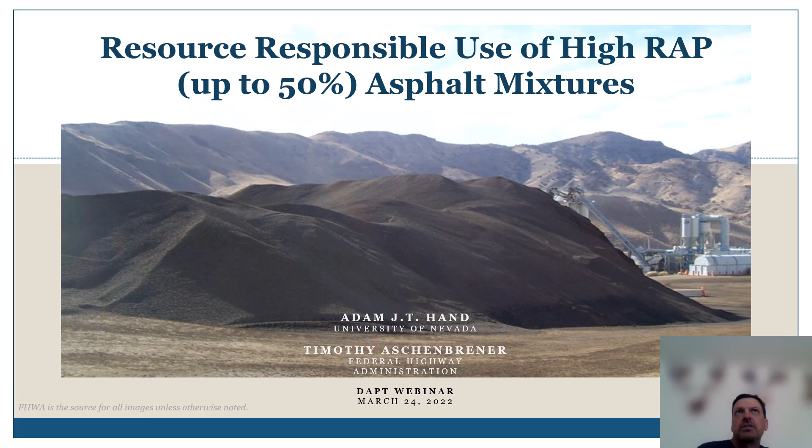Hi, I'm Adam Hand at the University of Nevada, and I'm going to talk about resource responsible use of high RAP up to 50% asphalt mixtures. This was developed with myself and Tim Aschenbrenner of FHWA, and it was developed under a cooperative agreement with the Federal Highway Administration. It's all about implementation. UNR is the prime contractor, and ARA and Paragon Technical Services are our partners on the project.

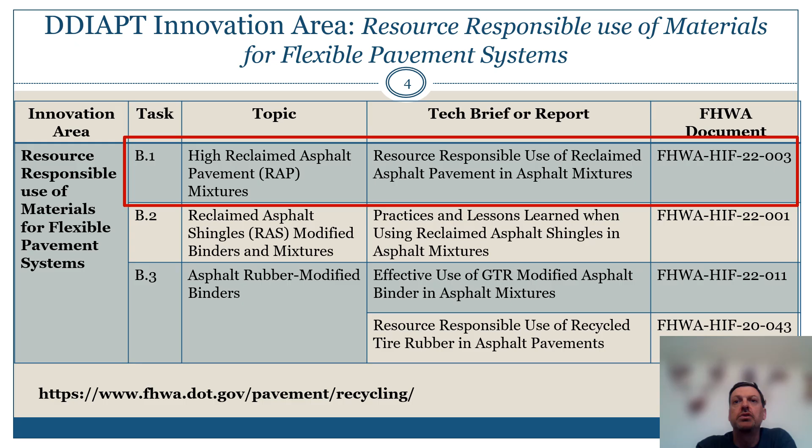This work that we're presenting today is one of about 15 different tasks we have ongoing. This task is associated with the topic of high reclaimed asphalt pavement mixtures, and the reason I wanted to stop on this slide was to highlight the title of the tech brief associated with this webinar presentation. At the URL on the bottom of the screen, you can find the tech brief, and the document is FHWA HIF 22-003.

Our target audience today, and with all of these implementation focused webinars we're doing in this series, is really state DOTs, asphalt contractors and producers, as well as the engineering community that works both for the DOTs and contractors, and of course academics.

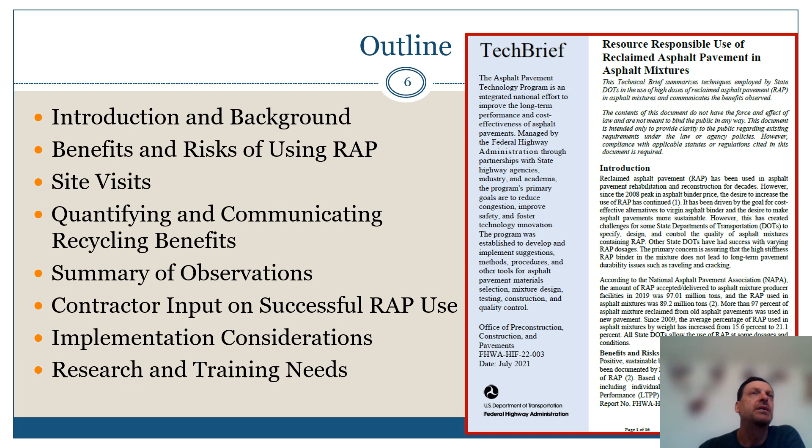The tech brief is 16 pages, and the outline is summarized here. We're going to go through each of these sections, but in summary, we're basically going to give you some background about how we went about developing the tech brief, the observations we took away from the development, and then we'll wrap things up with a summary.

In terms of background, there's a long history of using RAP here in the United States. It goes back to the oil embargo of the 70s. All states allow the use of RAP, and in 2008 we saw a significant peak in asphalt binder price, and that led to an interest to increase the amount of RAP we were using in our mixtures.

Shortly thereafter, in 2011 and again in 2013, a couple of key reports came out, which you can find in the references in the technical brief. One was by FHWA and the other was an NCHRP report, but both basically said that you could successfully use RAP and get similar performance to virgin mixtures with RAP up to about 30%. It wasn't really high levels of RAP.

In 2014, the industry began to recognize that we're having some stiffness issues with our mixtures and getting some cracking that was really going to be a long-term durability problem.

Folks began to do different things to see how they could succeed while using high doses of RAP, and the reason for that is with high doses, there's some really positive benefits from a sustainability perspective, not only in cost but environmental benefits, things like conservation of natural resources and reduction of greenhouse gases, and of course societal benefits.

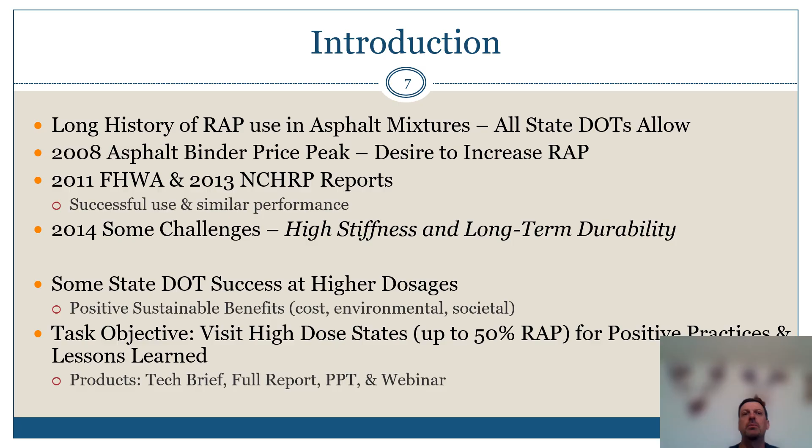So our objective in this effort was to identify states that were using high doses of RAP up to 50% and visit with them to summarize the positive practices they were using and the lessons they had learned, and then put together the tech brief we did, a full report which is a summary of all the individual state reports. There were 6 of them. This PowerPoint, and then we present this webinar and future webinars if other folks would like it.

The question posed here: why responsibly use high RAP? Well, obviously, again, I talked a minute ago about the very positive environmental impacts on the conservation of natural resources and reduction of greenhouse gas emissions. And of course, cost. You can't just look at initial cost, you have to look at life cycle cost.

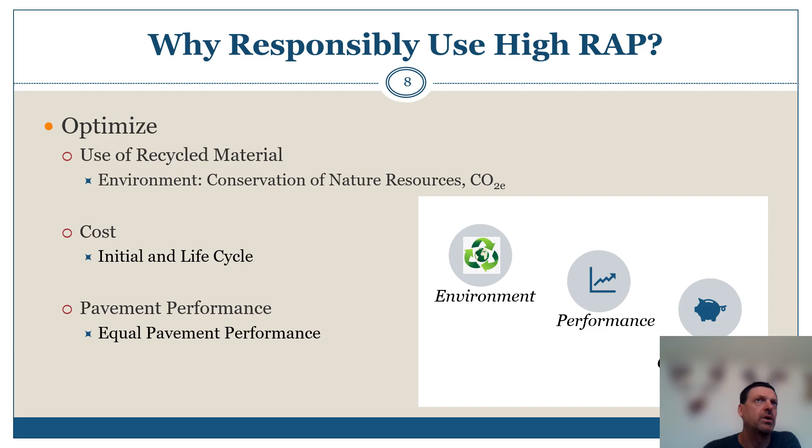So we want to make sure we get equal or better performance over the entire life cycle of the pavement. And that's the goal, regardless of whether you're a state DOT or a producer. We want good performing mixes.

Now, a little bit of background: NAPA, the National Asphalt Pavement Association, does an annual survey on recycled materials and warm mix asphalt use. The most recent version was just published a few weeks ago, and you can find the publication at this link in the lower left corner.

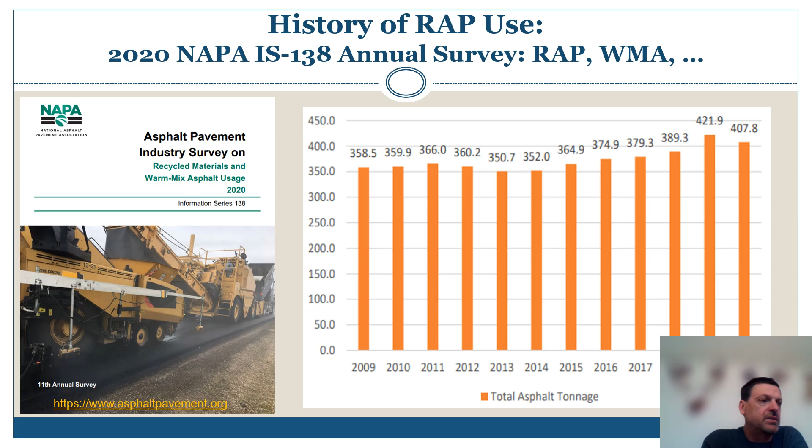What this slide shows is that we produce around 400 million tons of hot mix annually in this country. In 2019 we were at 422 million... 2020, 408, and we'll probably be a little more than that in 2021. I'm not going to go through all the data in this slide, but this shows the amount of tons of RAP that are basically generated and accepted. The reality is about 93% of those go right back into hot mix asphalt. The others go into things like cold mix, recycled aggregates, etc.

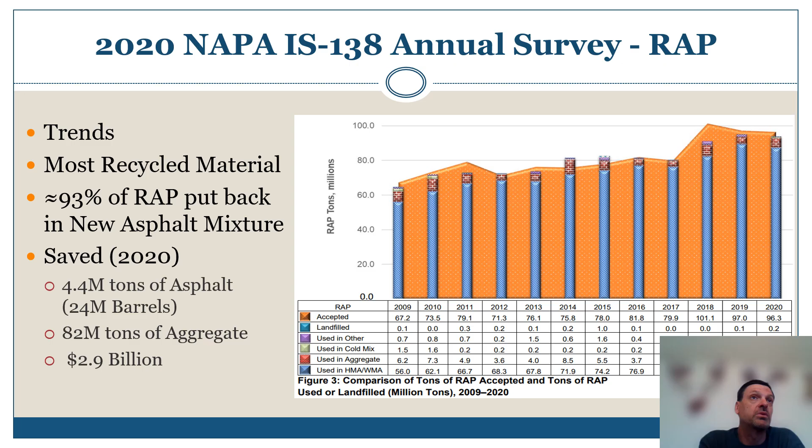In 2020 alone, it's estimated that about 4.4 million tons of asphalt binder were saved by recycling asphalt pavement, 82 million tons of aggregate were saved, and a cost savings of about $3 billion was realized.

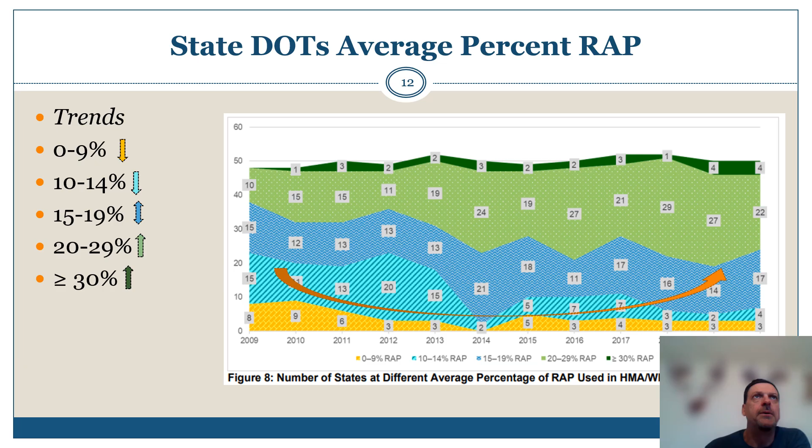This slide shows trends in allowable RAP percentages, and what we've seen in the last 11 years is a decrease in the number of agencies, DOTs, that allow between 0 and 9 or 10 and 14% RAP. So this blue and gold has dropped, and there's been an increase. You notice this green here, there's been a pretty significant increase in the amount of agencies that allow between 20 and 29%.

This slide is really encouraging because it illustrates the positive impacts of recycling from a greenhouse gas emission perspective. The blue bars are annual reductions in millions of metric tons of CO2 equivalent, greenhouse gas emissions, and we see a positive trend from 2009 to 2020. We went from about 1.5 million metric tons in 2009 to 2.3 million metric tons of greenhouse gas emission reductions in that 11-year period.

In the background you see the yellow, which is cumulative savings in emissions, or reduction in emissions, over that same 11-year time period. It's pretty cool. The reduction in emissions due to using RAP in hot mix asphalt is almost 24 million metric tons over that time period.

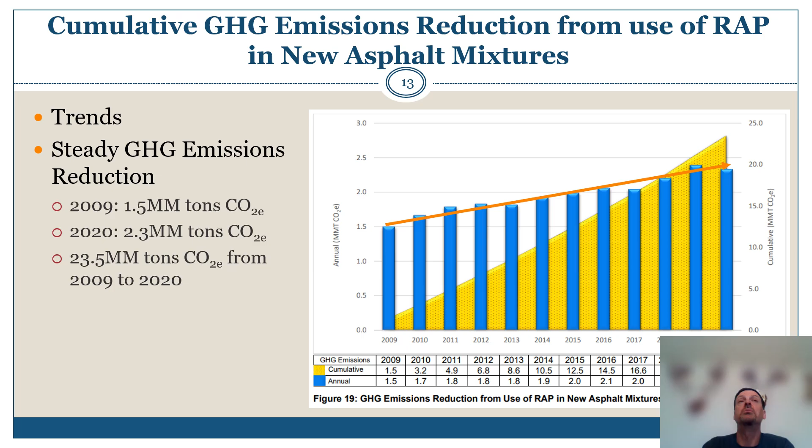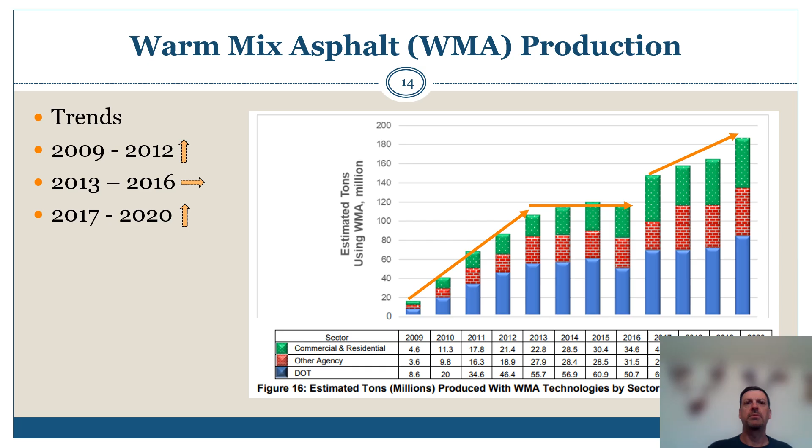This slide shows warm mix use, which was introduced in the late 2008-2009. The use of it increased significantly, plotted in terms of tonnage, and then it sort of flattened out. In 2017, though, the use began to increase again, and the use of warm mix from '19 to '20 saw a pretty significant increase, and again that was mostly in DOT mixes. So this is another encouraging trend from an environmental or sustainability perspective.

This slide shows that early on, warm mix was primarily made by foaming with water, and about 10 to 15% chemicals were used. Today, both water and chemicals are used, and it's about a 50-50 split.

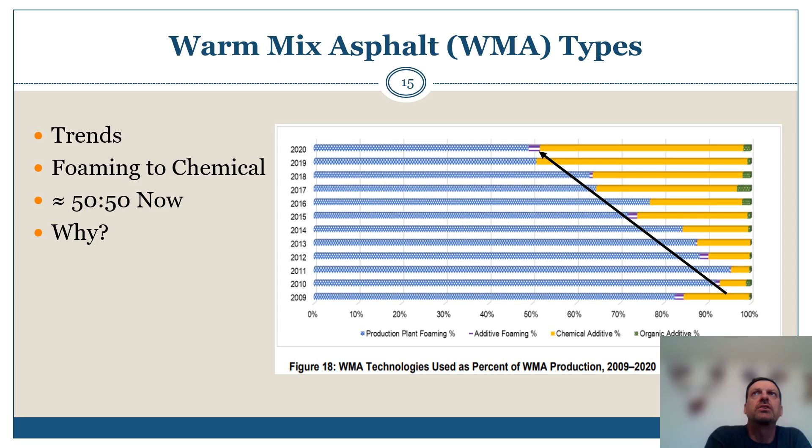Now, I want to thank the states that participated in our virtual visits. We visited 6 states: Florida, Nebraska, New Jersey, South Carolina, Washington, and Wisconsin.

And we didn't just pick 6 states out of our hat. We did a little bit of homework to try to make sure we found states that were truly using high percentages of RAP. Florida was selected because they have unlimited RAP use for some mixes, so you can put as much as you want in, depending on where they're going in the pavement structure. Nebraska averages 39% RAP in their mixtures, or has for at least the last 6 years.

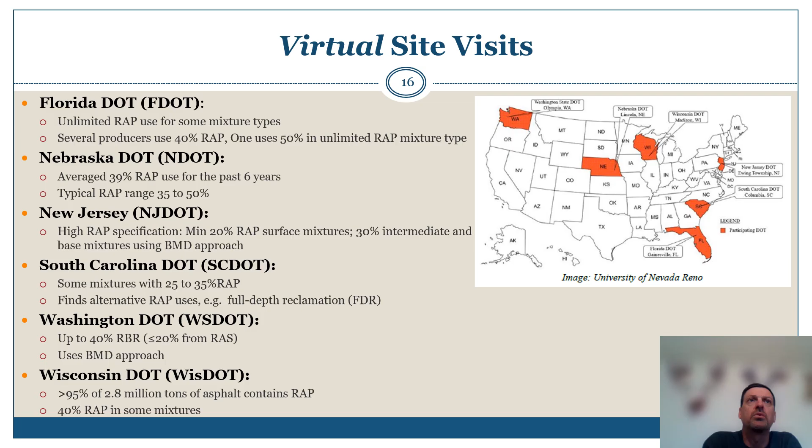New Jersey has a high RAP specification, which is unique because it has a minimum RAP requirement depending on the location in the pavement structure, and New Jersey is using a balanced mix design approach. South Carolina uses 25 to 35% RAP. Washington State DOT allows up to 40% RBR, so if it's all RAP, it could actually be over 40%, and they also are using a BMD approach. Wisconsin DOT boasts that over 95% of the hot mix produced for the DOT contains RAP, with up to 40% RAP in some mixes.

So before we get into the nuts and bolts of things, there were two things that were done by some states that were really positive: one was quantifying and communicating the benefits of recycling, and the other was measuring performance and reporting that.

We'll start with Nebraska DOT, and there's a link on this page here to a Nebraska annual report. That annual report includes recycling goals, the amount that was recycled in the previous year, and the cost savings associated with that material that was recycled.

Nebraska also has a special provision that incentivizes contractors to recycle because they get to share in the cost savings, depending on where the RAP comes from, up to 50%.

They also have what they call post-consumer labelings, and then on the plan sets you have this image here. This image shows the raw material needed in terms of tonnage, how much is going to be replaced with post-consumer recycled materials, and what the percentage is. So 35% is going to be in this example, and the estimated value of that recycling.

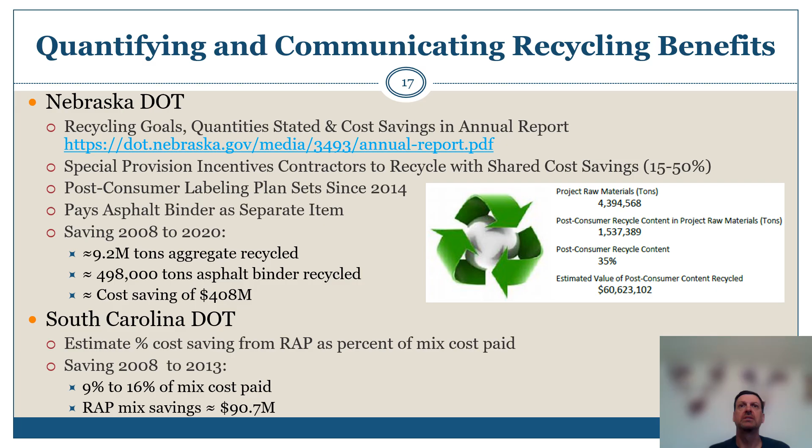Now this slide is a performance estimate, or really a comparison of high RAP and no RAP mixes. This was done by Florida DOT, and published in TRB, Transportation Research Record, in 2012. Again, the reference for this you can find in the tech brief.

What the slide shows is these are different projects with 30% RAP, 35, 40, 45, and 50, and then 0% RAP. These are all intermediate course mixes, and the y-axis is performance, really as a function of truck traffic and age, the age being when the pavement was resurfaced. We see that as RAP increases from 30 to 50%, we get a slight decrease in overall performance of about 6-7%.

However, on average, all of the RAP mixes outperform the average of the virgin mixes.

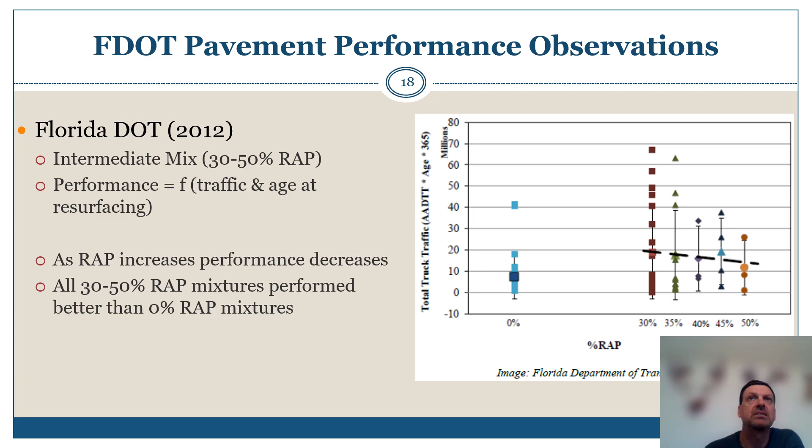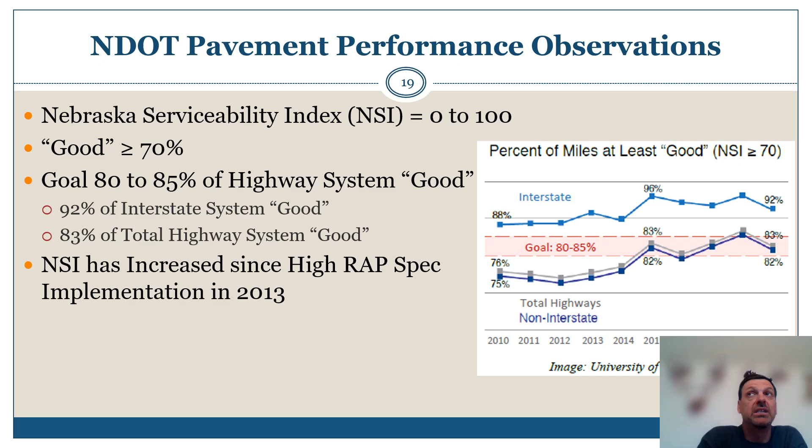From about 2015 to present, the goal of 80 to 85% has been reached for the total highway system, including the interstate and non-interstate. What's really most interesting is that they implemented their high RAP spec in 2013, and the overall performance of the system has improved significantly.

Washington State DOT has looked at the performance of its mixes twice. In the mid 80s, they looked at the comparison of virgin mixes and RAP mixes, and came to the conclusion that they were both offering equally promising performance.

Then in 2017, they took a deep dive into their pavement management system data, looking at individual as well as composite performance factors, comparing those for what they call high RAP. Washington has two categories: no to low RAP, which is 0 to 20% binder replacement, and greater than 20% binder replacement, up to 40%. So they have sort of low and high.

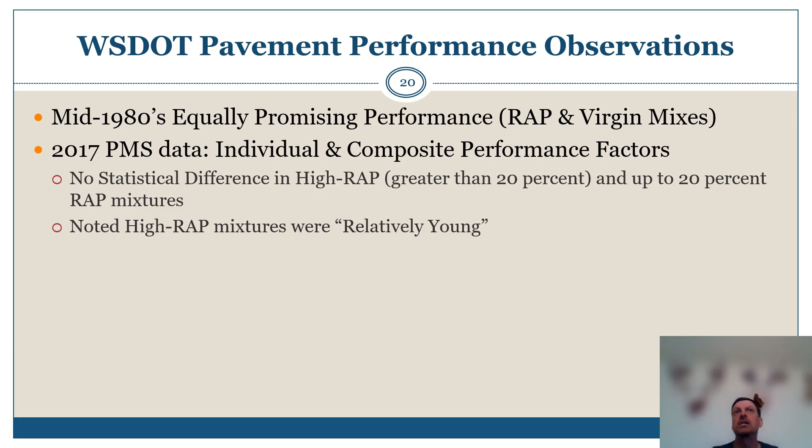The statistical analysis they performed revealed that they couldn't find a statistical difference between the two categories of mixes, low and high recycle. Washington allows RAS in their mixes also. They did note that some of the high RAP mixes were relatively young compared to some of the virgin or low RAP mixes considered in the study.

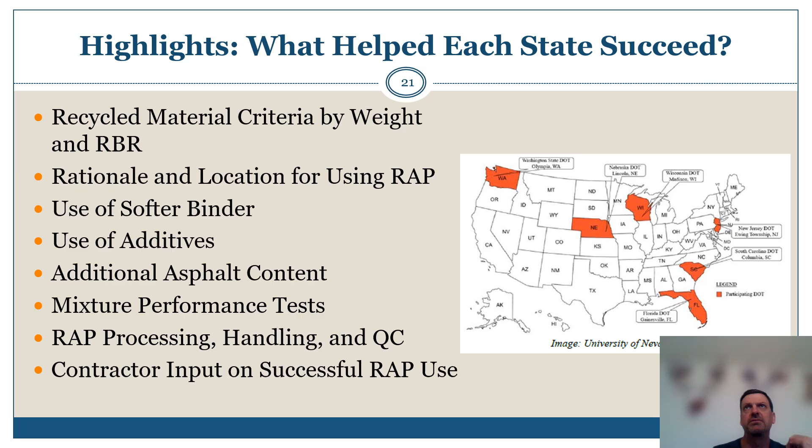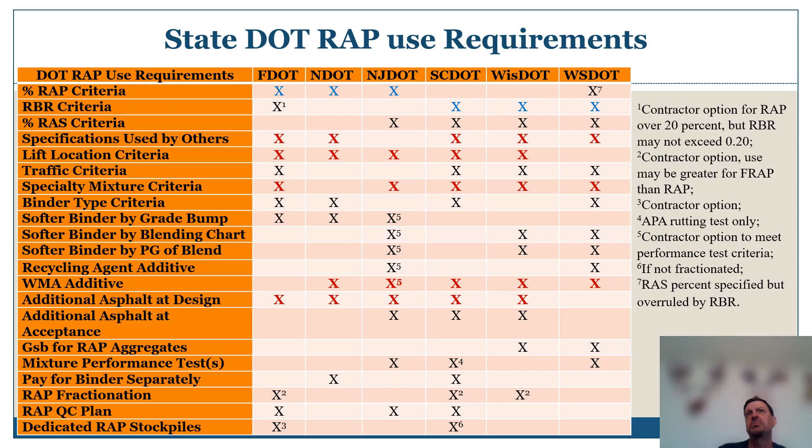So what did these states do to succeed? There's a whole list of items here, and we're going to go through each one individually. This is a summary table, we won't go through it in detail, but I'll suggest you note the things highlighted in red with bold X's, because those are items that many of the states were using.

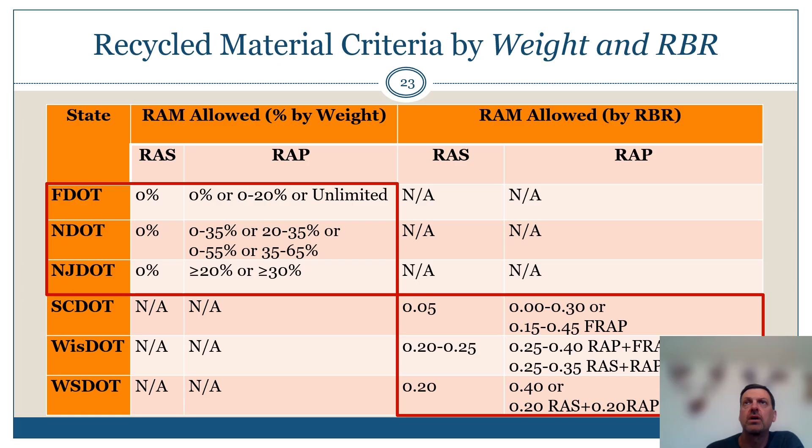If we start with the recycled material criteria, that's a criteria either by weight or by RBR. We have two camps: states that do not use RAS, zero RAS, seem to be using allowable percent RAM, reclaimed asphalt materials including RAP and RAS, by weight. Those that allow RAS are using RBR for their criteria, and additionally several are using fractionation.

Now as far as rationale for location in the mix within the pavement structure, different states did different things. It's really part location, and part could be traffic — there's lots of things that could be used.

This slide, I'm not going to go through the nuts and bolts of it, but at the state level, Florida considers mix type, location, binder type, and geographic location. Nebraska DOT uses mix type and location.

New Jersey DOT uses mix type and location. South Carolina DOT uses mix type, location, and classification of traffic. Wisconsin DOT uses location, mix type, traffic, RAM type, and RAP fractionation. Washington State DOT uses just mix type.

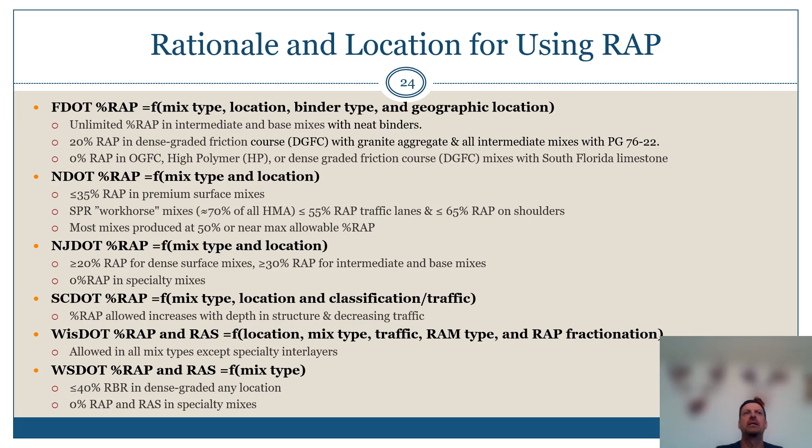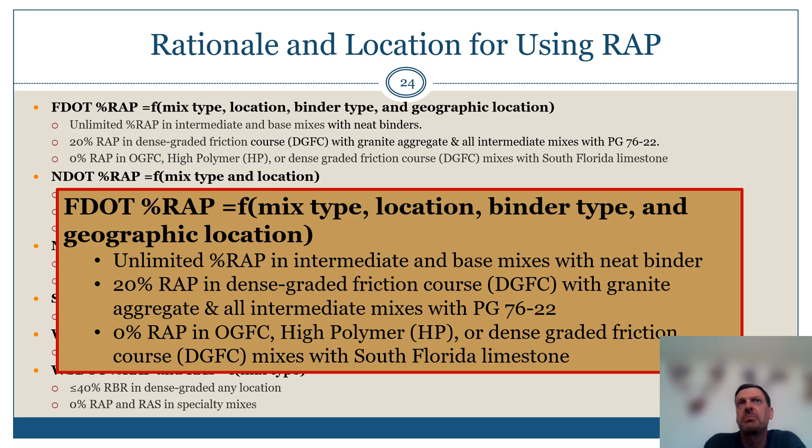As an example of the detail you'll find in the tech brief, Florida DOT allows unlimited RAP in intermediate and base mixes if the binder being used is a neat binder. 20% RAP can be used in dense graded friction courses with granite aggregates, and in all intermediate mixtures that contain PG 76-22. In southern Florida, they have limestone materials that are not as ideal as the granitic materials used in the northern part of the state. In that area, you cannot use RAP in open graded friction courses, high polymer mixes, or dense graded friction courses.

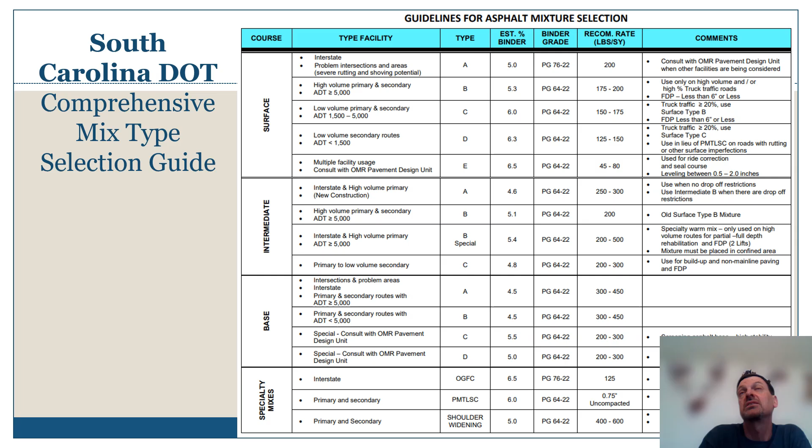This mix selection guide also has some really good comments, so I think it's a great tool to help, because sometimes we get siloed. We have pavement designers in one part of the DOT campus, and maybe the materials division in another, and they don't necessarily always talk. I think it's a great tool to make sure the right mixes are being used in the right locations.

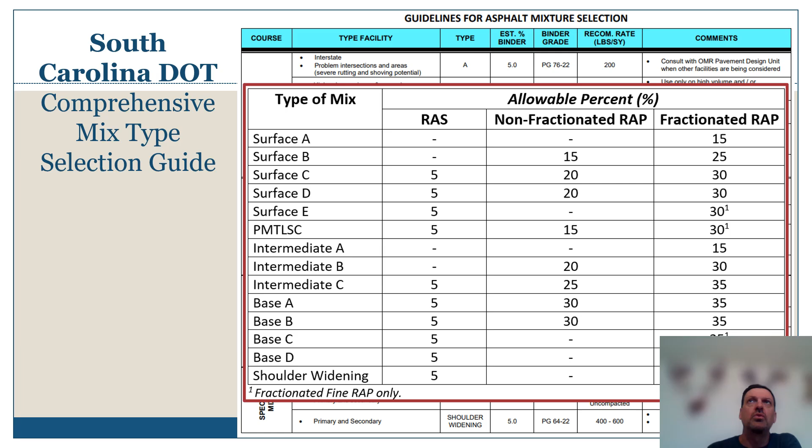To go along with this, they have a table that indicates how much recycled material can be used in each of those mix types. One thing you'll note is that there are both non-fractionated and fractionated RAP, and with fractionated RAP the contractor is allowed to use between 5 and 10% more RAP than with non-fractionated RAP.

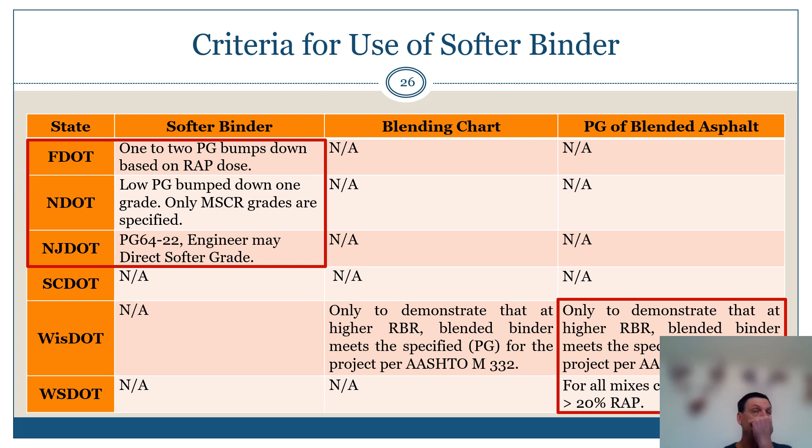For quite some time, agencies have been using softer binders when they use RAP, along with criteria for the amount. We've had two schools of thought among six states. One is those agencies dropping PG grades—bumping down—which would be Florida, Nebraska, and New Jersey. Then Wisconsin and Washington DOT require that the blended binder, meaning your virgin binder, your RAP binder, and any recycling agent, blend to the PG grade required for the given location the mix will be used in.

Additional asphalt content is a big deal. Several states were taking different measures to try to get additional asphalt content into their mixtures. One common approach was using a reduced number of gyrations, going from say 100 gyrations at a given traffic level down to 75.

Another approach is regressed air voids—selecting optimum asphalt contents at an air void level below 4%. Nebraska, as an example, goes down as low as 1.5% air voids, which is going to be a real high RAP content mix, probably for a shoulder. We also saw several states using VMA as a tool, setting VMA criteria greater than the minimum in M323.

Some states were using the bulk specific gravity of the RAP aggregates. We all know that if we use effective specific gravity, we overestimate VMA, and that's a problem with high RAP mixes. Wisconsin DOT was using reduced gyrations, regressed air voids, increased VMA, and RAP bulk specific gravities—again a good example of best practices.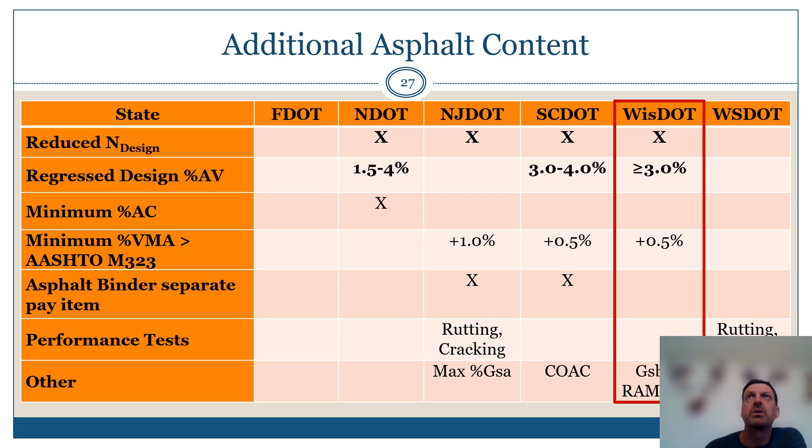South Carolina DOT uses something called the corrective optimum asphalt content. They suggest that only about 75% of the binder in the RAP is available. So you do an asphalt content design, come up with your optimum, and then add an additional 25% of whatever the contribution is from the recycled materials, based on whatever percentage of the total binder is in that optimum.

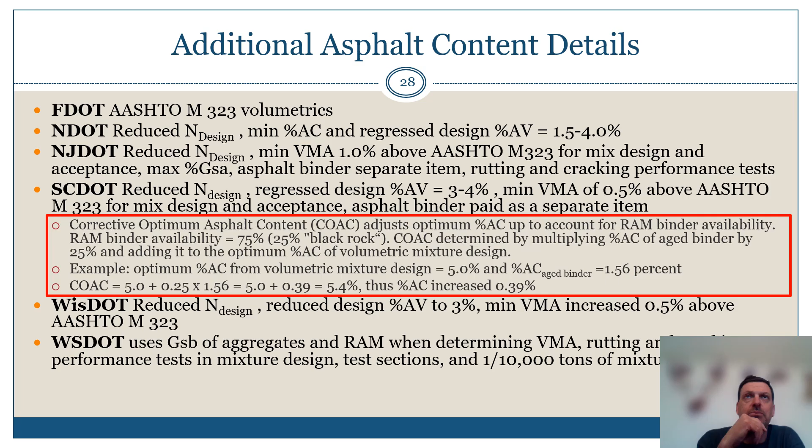In this example, you get an optimum of 5%, and the aged binder, or the binder in the RAP, was 1.56% of the total. You multiply that by 0.25 and add it to the 5% you had for your total, ending up with a 5.4% optimum asphalt content.

One of the things that several states did was allow the use of additives for making high RAP mixes. Warm mix asphalt was allowed by all states as long as it was chemical, at the contractor's option. Four states allowed the use of foamed asphalt for warm mix.

As far as liquid anti-strips go, 5 of the 6 DOTs either allowed or required them. And Wisconsin DOT also included the use of hydrated lime.

For recycling agents, New Jersey and Washington State DOTs allow recycling agents at the contractor's option. In both cases, it's the need to get the grade of the blended binder to the grade required for the particular climate. The Florida Department of Transportation wants to limit the amount of REOB that can be used, and they've got a provision to do that, which is a combination of a delta Tc waste oil provision and a limit on the amount of REOB.

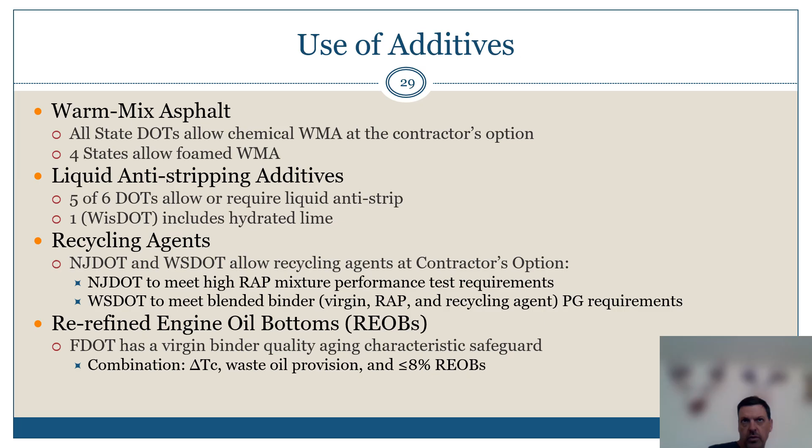When it comes to mix performance tests, 3 states are using performance tests currently. New Jersey is using the APA and Texas overlay, and South Carolina is using the APA. The Washington State DOT is using the Hamburg wheel track test and

the indirect tensile strength test. Actually, WashDOT has been doing that since about 2013, when they implemented their high RAP spec.

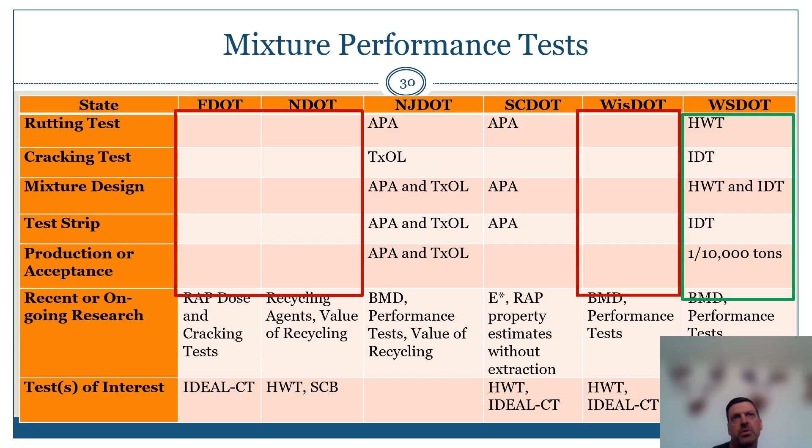All the states are doing some form of research when it comes to performance testing, and the tests of interest identified by the states were listed in this bottom row here. It's pretty clear that Ideal CT and Hamburg wheel track tests are the most common among the states that we interviewed.

As far as processing and handling goes, one thing that was pretty common was requiring QC plans, and that might be for RAP specifically, or that RAP be included in project QC plans.

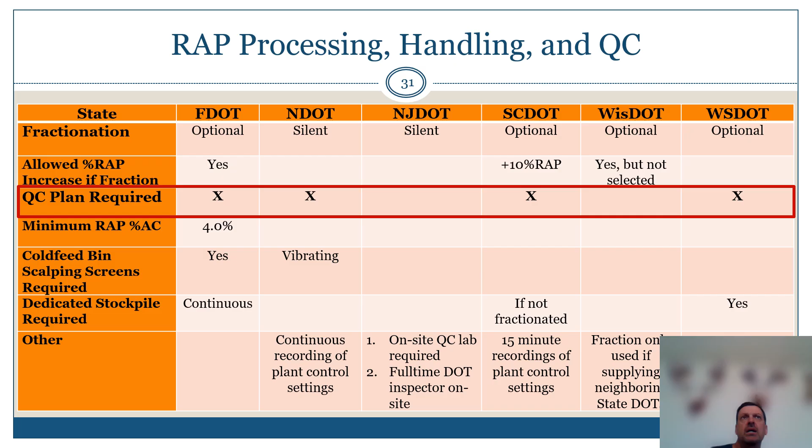We asked the DOTs if we could schedule interviews with contractors, and sometimes those were organized through a state pavement association. There might be multiple contractors in the interview, and we had a standard question set. We asked them what they thought they were doing that was helping them be successful with high RAP use.

The most common responses were: verifying the percent RAP, not only the percent of RAP going into the plant, but the amount of binder in the RAP, and having good control of that. And then controlling dust. As we increase the amount of RAP we use, we're increasing the material passing the number 200 sieve, so we may have to reject fines.

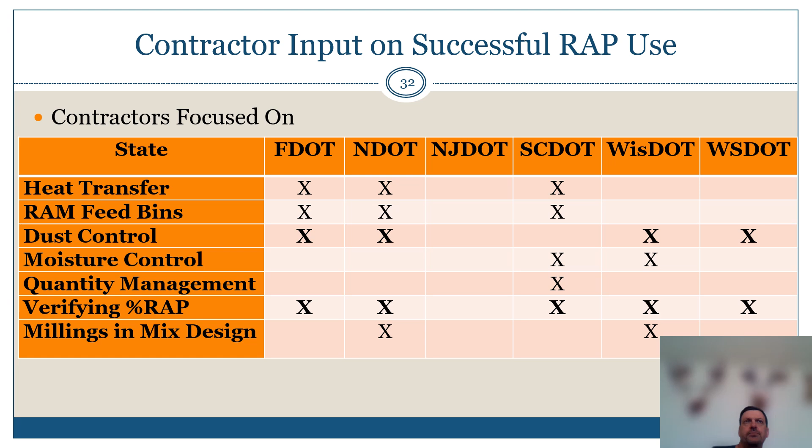Contractors also said that getting representative samples was really important. In 2 states, contractors indicated that they were using regular, full-size cold milling machines to collect large samples of RAP, so that they had good ideas of what they were going to be using when they went into production.

They all talked about having the right hardware at the plant, in other words the right equipment needed at the plant to successfully use RAP. Moisture content, or managing moisture, was another topic that came up frequently. RAP has a tendency to carry high percentages of moisture, so obviously it's important.

And then again, controlling fines, and performing process control - that's testing and inspection beyond what's required in terms of QC.

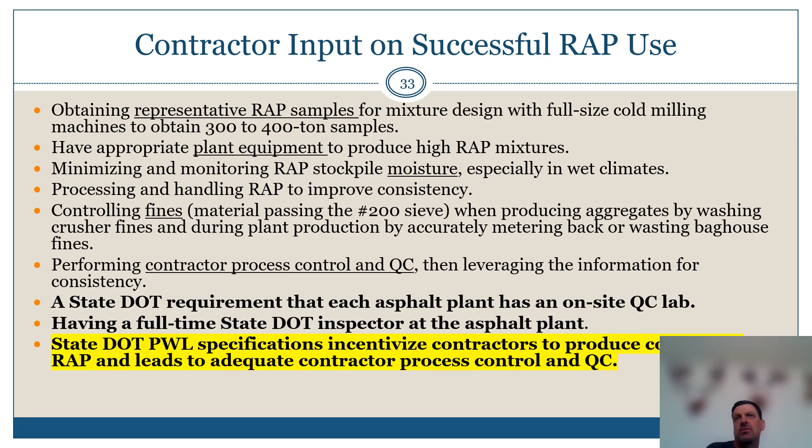These last three bullets are really interesting because they came from the contractors. One is a state DOT requirement that each asphalt plant have an on-site QC lab. Another was having a full-time state inspector at the asphalt plant, again coming from a contractor. And finally, that state DOT PWL specifications incentivize contractors to produce consistent RAP, and that led to adequate contractor process control and quality control, because they want to succeed - they want to be able to get full payment for the product they place, if not a bonus.

Now that's sort of the observations. Now we're going to go into, from an implementation perspective, what agencies might want to consider programmatically in terms of mix design, acceptance, production, and quality.

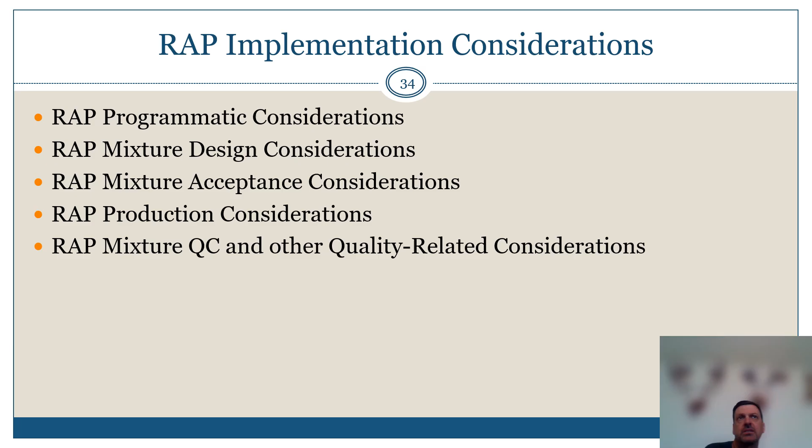From a programmatic perspective, again we saw that successful states were using selection criteria for mix type and allowable percentage of RAP, having strong QA programs, reporting annual RAP use, and incentivizing contractors to use RAP.

Again, Nebraska had that interesting special provision, and another incentive would be paying for asphalt as a separate item, tracking and reporting cost savings associated with the use of RAP, and then monitoring RAP performance and RAP mix performance as a function of time, making revisions to optimize the performance of mixes.

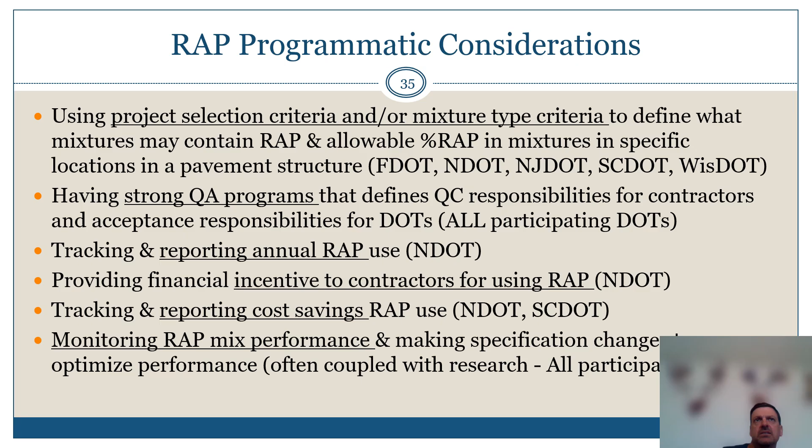From a mix design perspective, considerations would be, again, RAP criteria by weight or RBR, using softer binders, increasing asphalt binder content, and there are lots of different techniques different agencies were using, using recycling agents, characterizing RAP, having a good understanding of the RAP that's being used. In other words, having a specification that encourages the contractors to do that.

Using the bulk specific gravity of the RAP aggregates rather than GSE to calculate VMA. If you're using 10% RAP, it's not a big deal, but when you get up to about 30%, you can begin to see some pretty significant differences in actual VMA versus indicated VMA from using GSE.

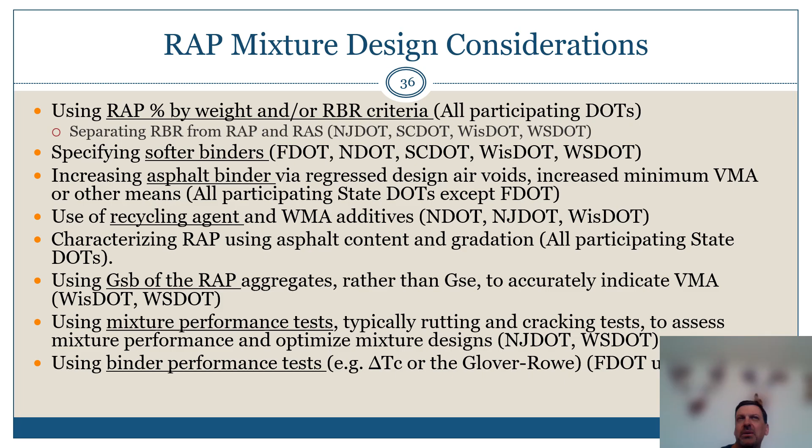Using mixture performance tests, that's the path of the balanced mix design. And then again, Florida was using some binder performance tests to limit the use of RAP.

From an acceptance perspective, the PWL specification, right? We heard not only from the states being happy with it, but also the contractors saying that it was part of the reason why they were successful.

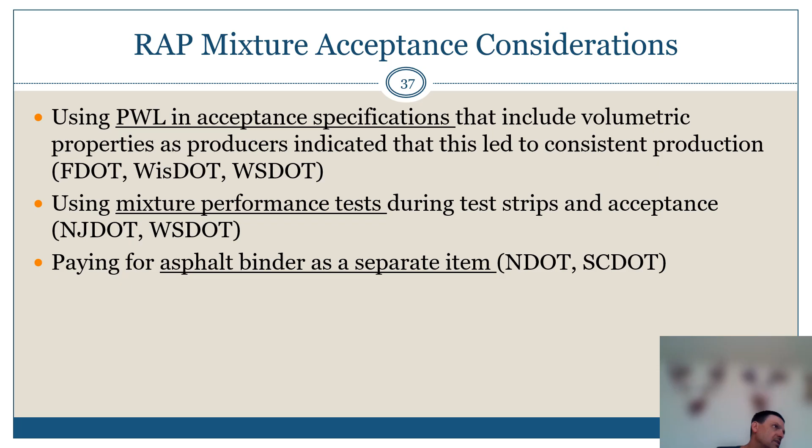Using mixture performance tests, again, New Jersey and Washington are doing that, and then paying for asphalt as a separate item in both Nebraska and South Carolina.

From a RAP production perspective, some states require dedicated stockpiles. In other words, a contractor processes RAP and sets it aside as a lot, and that material can be used in a given mix design, right? So the mix design will identify the lot of RAP, and only that RAP can be used in that mix. You can't supplement the piles.

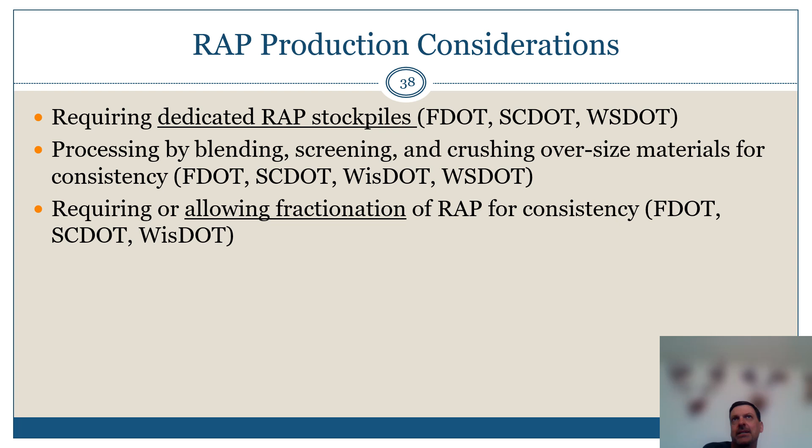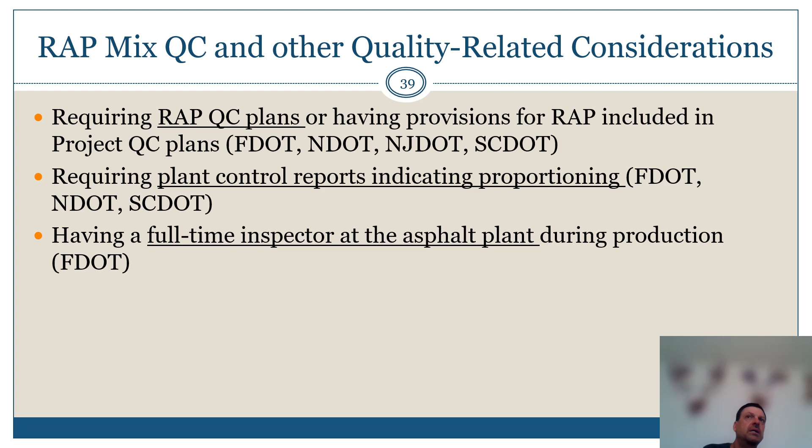And then allowing fractionation was reported as a positive practice. From a QC perspective, having quality control plans, whether specifically for RAP or RAP being included in a project QC plan, and then requiring plant control reports that indicate proportioning be printed or dumped to a data log on a given frequency, and then having a full-time inspector at the asphalt plant.

We also asked the states what they thought there were needs in terms of research and training, and Florida DOT indicated that there was a need for a high RAP mix design methodology for very low volume roads. Nebraska and WashDOT indicated that there was a need for additional recycling agent research.

New Jersey identified the need for identifying alternative RAP uses because they use a lot of high performance thin surface courses rather than doing mill and fills. So they've got RAP on the ground that's not going back into surface mixes, and a lot of work is surface mix. South Carolina DOT believes there's research needed on top-down cracking with high RAP mixes.

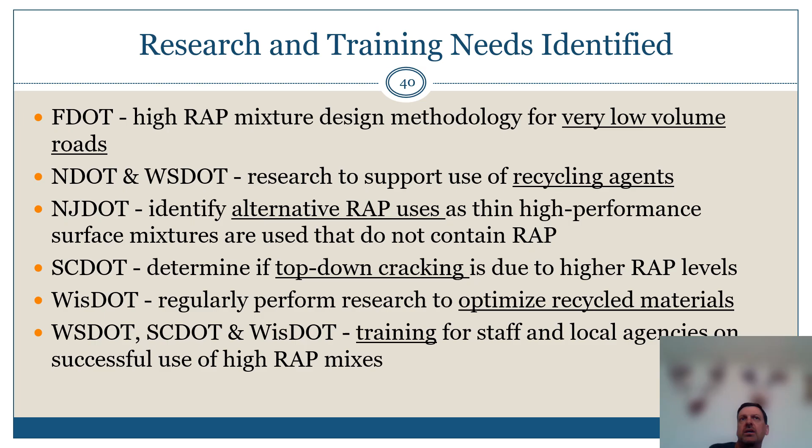Wisconsin DOT believes that there's research needed to optimize recycled mixtures, materials use in asphalt, and they regularly have ongoing research on that topic. And then 3 states said that there was a need for training for staff and local agencies on successful use of high RAP.

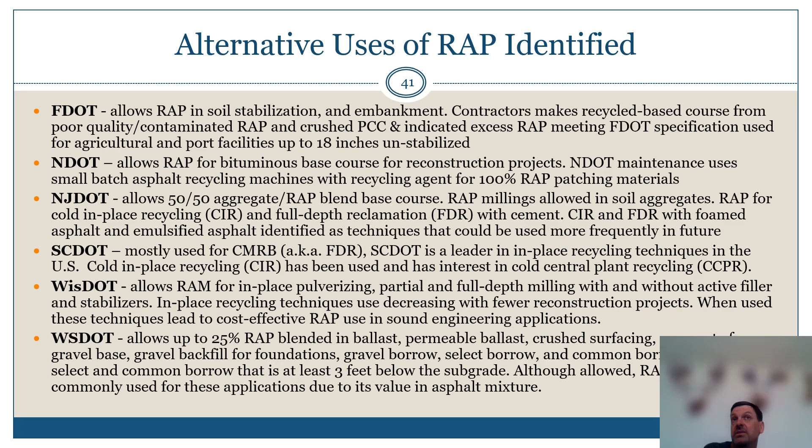And 2 states, South Carolina and Wisconsin, identified full depth reclamation as a really good use, and they're using quite a bit of it.

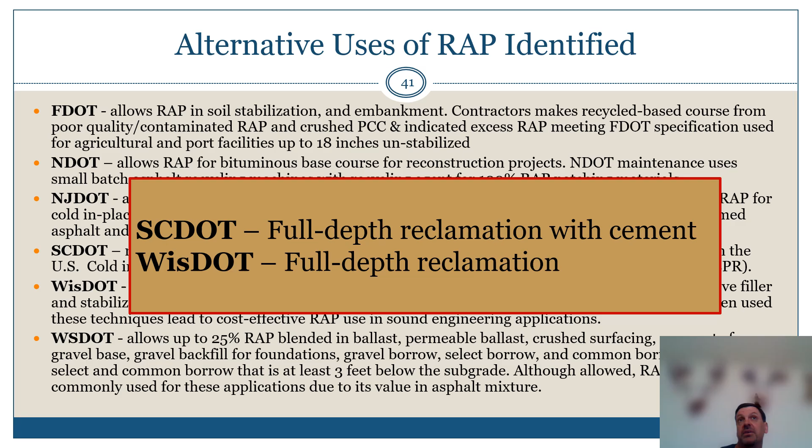So in summary, the use of RAP in asphalt mixtures can provide sustainable benefits from not only a cost perspective but environmental and societal benefits. Improvements in materials, mix design, and processing and handling can lead to successful use of high RAP mixes. We've seen that.

NAPA reports that about 20-21% RAP is typically used by state DOTs, but those that participated, 6 that participated in this process, are using basically 30 to 50%, and that's pretty darn good. That's really taking it to another level above the average state.

The states indicated optimizing RAP for good performance can be accomplished through several things, and at a very high level: regular review of DOT specs, mix design procedures, and performance test methods, and then monitoring pavement performance and working collectively as a team, the agency and industry together, to make improvements to specifications, and then reporting the benefits of RAP, whether it be cost savings, material use, total recycled materials used, materials that were conserved because they weren't mined or refined, as well as performance.

And again, we can't forget the societal benefits are important.